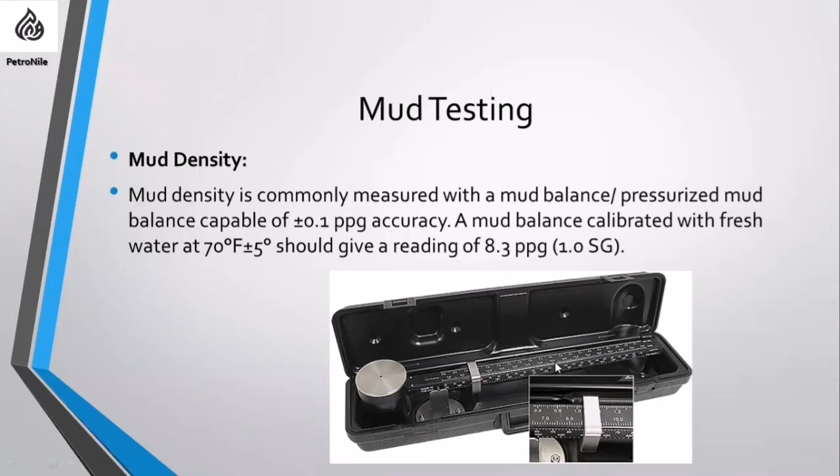Marsh funnel viscosity. Marsh funnel viscosity is the time required in seconds for a quart of mud to flow. This is the quart cup. We put mud here until it fills the Marsh funnel and let the mud flow from this opening to fill this cup. We will check how many seconds it takes to fill this cup, and we will report that time as the Marsh funnel viscosity in seconds.

And 1 quart of water should flow through a Marsh funnel in 26 plus or minus 0.5 seconds. So this is the Marsh funnel and mud balance. This will be a check on the top of the mud tanks; it will not be in the mud lab. You will check by derrickman or mud tester or mud boy. These are all names for the mud helpers, from the crew, to help the mud engineer.

He has to check the mud density and the Marsh funnel viscosity every 30 minutes and record in the book. And the mud engineer checks from time to time, checks the book and also checks by himself.

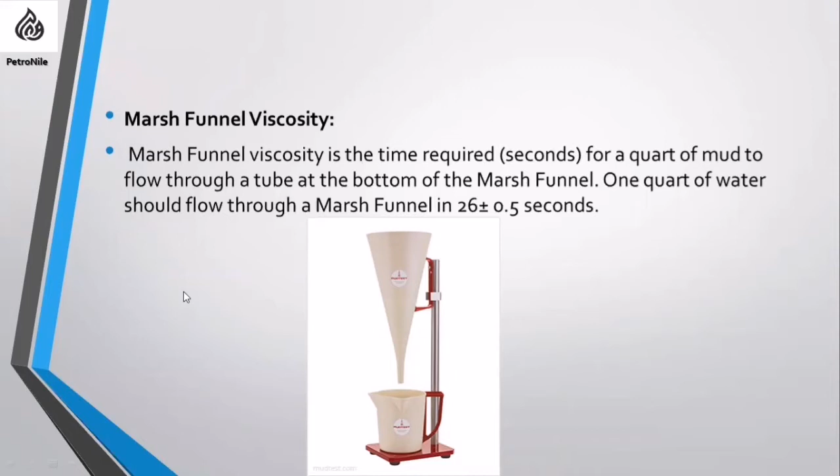Rheology: this is the rotational viscometer, sometimes we call it rheometer. This is used to measure shear rate and shear stress of drilling fluids, and plastic viscosity and yield point are calculated directly from readings. We have 6 readings here: 600 RPM, 300 RPM, 200 RPM, 100 RPM, 6 RPM and 3 RPM.

Also, a long time ago, the old rheometer had 8 speeds. It also had 60 RPM and 30 RPM, but now just 6 readings is enough for most rheological models. We take the data from these readings and calculate. PV is equal to the 600 reading minus the 300 reading, and YP is the 300 reading minus PV. This is as per the Bingham plastic model.

Here, this is the instrument. This is a gear. This gear has 3 levels. Here down, going a little bit up it will be in the center, and going to the top it will be up. Here is down, and we have a key here, high and low. The other side does not appear in this picture. We will put mud here inside, and this will rotate with RPM as per this gearing and knob adjustment. We have here this table.

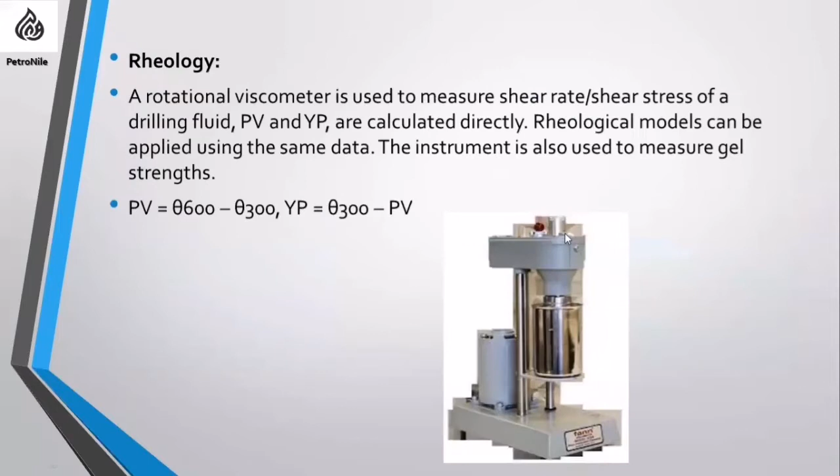Viscometer switch in high, and gear shift knob in the down: this will read 600 RPM speed. Then you will read the deflection here from the top. For the 300 reading, the viscometer switch will be in the low and the gear shift knob will be down also. For 200 and 100 the gear will be up, and the switch will be high for 200 and low for 100. When the shift is in the center, the reading will be for 6 RPM in the high and 3 RPM in the low.

After recording all these readings for 600, 300, 200, 100, 6, and 3, we can check the PV and YP, and also we can check some equations as per the rheological model, and this will usually be calculated by software for Reynolds number and annular velocity and everything in the rheology. We will discuss it, inshallah, in the next session.

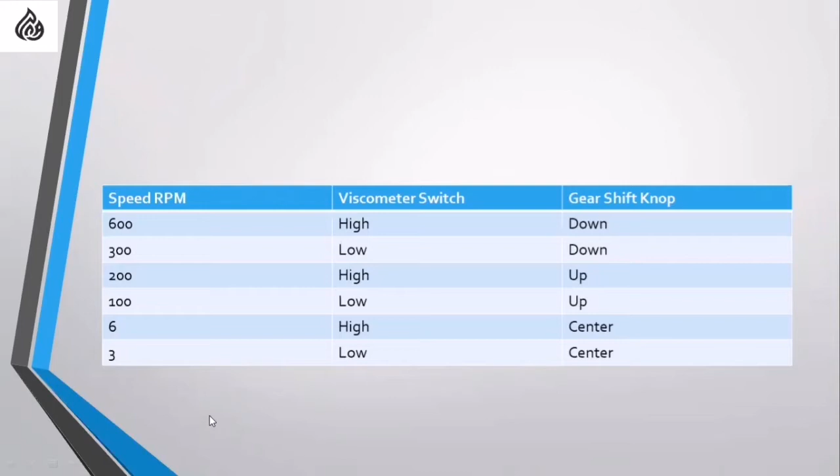Also for gel strength, we will read just 3 RPM. After 10 seconds, we will read the first deflection. This will be the 10-second gel strength. And after 10 minutes, also at 3 RPM, we will read. This will be the 10-minute gel strength. Also, sometimes we need to report the gel strength for 30 minutes, after half an hour. This is for the viscometer.

We also have the static filtration test. We have two types of test for static filtration: API filtration and HPHT filtration, high pressure, high temperature filtration. This test is used to indicate the filter cake quality and filtrate volume loss for drilling mud under specific testing conditions. API filtration will be under 100 psi for 30 minutes and reported as ml per 30 minutes, and filter cake thickness will be reported in 1/32 inch. 1/32 inch is equal to 0.8 millimeter.

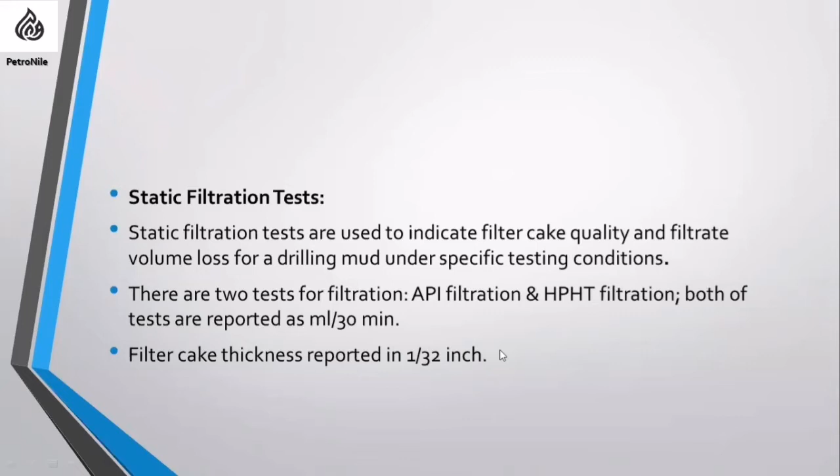For HPHT, the top pressure will be 600 psi, and the pressure from the bottom is 100 psi. So the test will be under a differential pressure of 500 psi, and we will also put it at high temperature. This depends on the bottom hole temperature. We can make the test up to 300 degrees Fahrenheit. This is the API filter press, and this is the HPHT, high pressure, high temperature filter press.

Here we put our sample inside and apply 100 psi from here, and filtrate will come from this opening for half an hour. We will check how many ml of filtrate we get, and this filtrate will also be used in titration for other tests.

Here in HPHT, we will apply 600 psi from the top and 100 psi from the bottom, and the sample will be inside, and this heating jacket heats the sample up to the required or desired temperature, and we will put a thermometer from the top here to check the temperature, and we'll adjust the temperature from here.

When we reach the temperature of 300, 250 or 280 as per the test needed, then we will start to apply the pressure and start the test. We will collect the sample from here. You have to open and check from time to time and collect till you finish the 30 minutes.

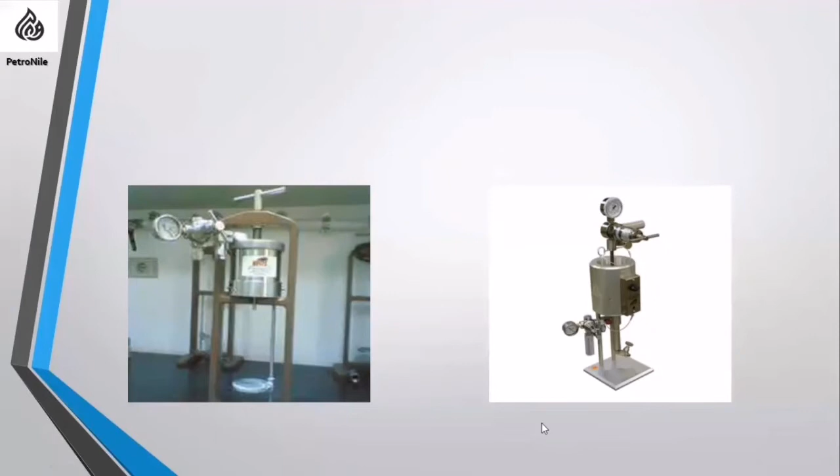And after finishing the test, you have to disassemble this instrument and check the filter cake thickness and filter cake quality. The retort is to check water, oil and solids percentage. This is the volume percent of the liquid phase.

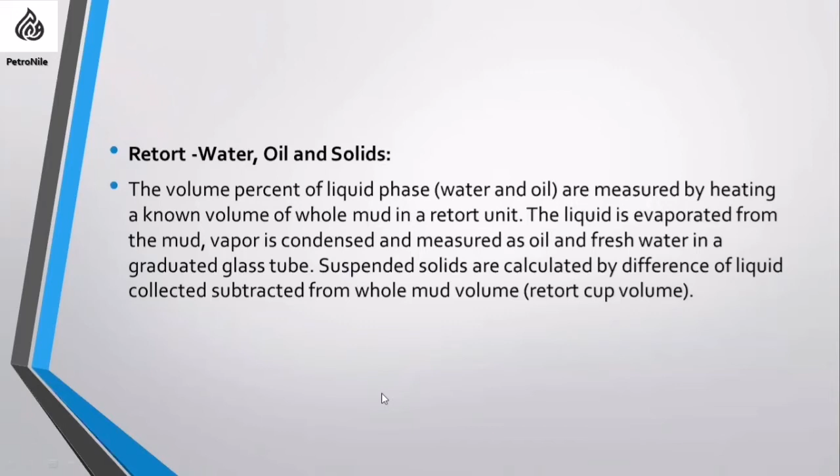Water and oil are measured by heating a known volume of whole mud, sometimes 10 mls, sometimes 50 mls, depending on the retort capacity. The liquid is evaporated from the mud. Vapor is condensed and measured as oil and fresh water in a graduated glass tube. Suspended solids are calculated by the difference of liquid collected subtracted from whole mud volume. It's in percentage. You have here, this is a retort.

This is the cylinder for 10 ml, this cylinder for 20 ml. We have also a cylinder for 50 ml. If we use, for example, this 10 ml, we will put mud inside and we will put steel wool inside to prevent the solids coming out and close this opening, because we just need the evaporation to come here. This cylinder will be inside the retort, and the evaporation will be condensed in this condenser and the liquid collected here.

This is like an oven only, just to heat the sample and evaporate all the liquid phase, condense it in this condenser and collect it here. We have 10 ml. If we get, for example, 8 ml liquid phase, oil plus water, that means we have 2 ml of solids. This 2 ml of solids from 10 ml means our solids are 20%.

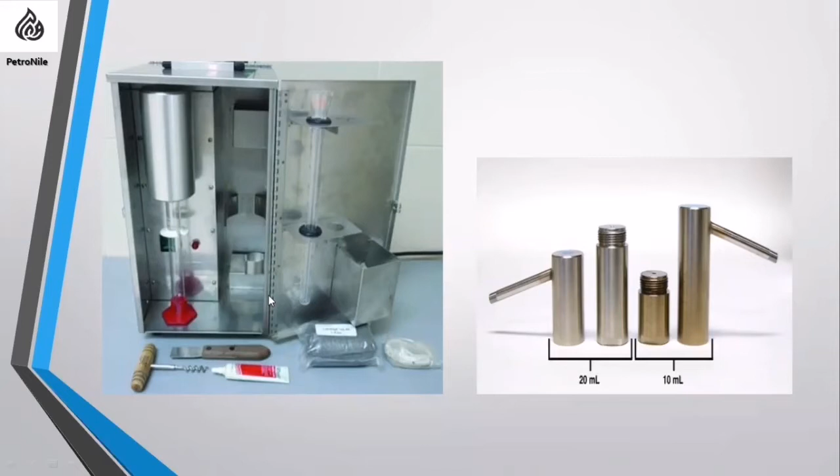It's calculated as a percentage. And from this, we do our calculations to check the LGS, low gravity solids, and high gravity solids, HGS, drill solids, and all solids analysis calculations. This is a retort. The test may take 1 hour or a little bit more.

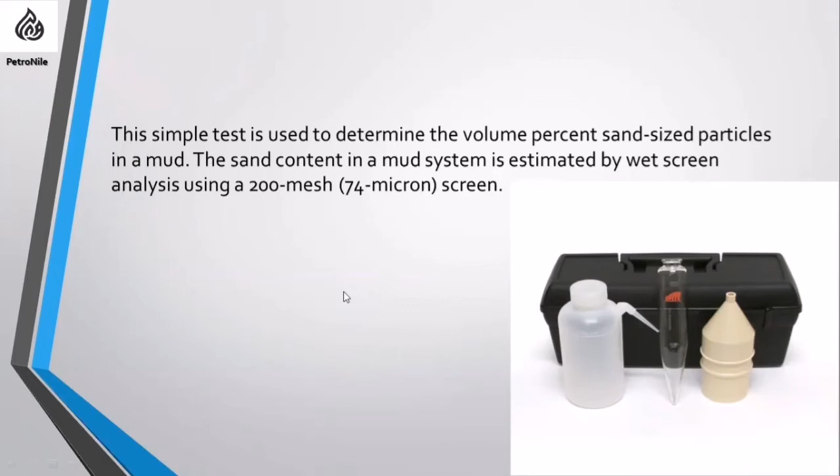If it's more, you have to dump the sand trap, dilute your mud with fresh mud to decrease the sand content, and also run the desander and desilter or mud cleaner and put a fine screen on the shaker, all this to control the sand content. Why do we need the sand content as low as possible? Because sand is an abrasive material. It causes wear on the drill string and the directional tools.

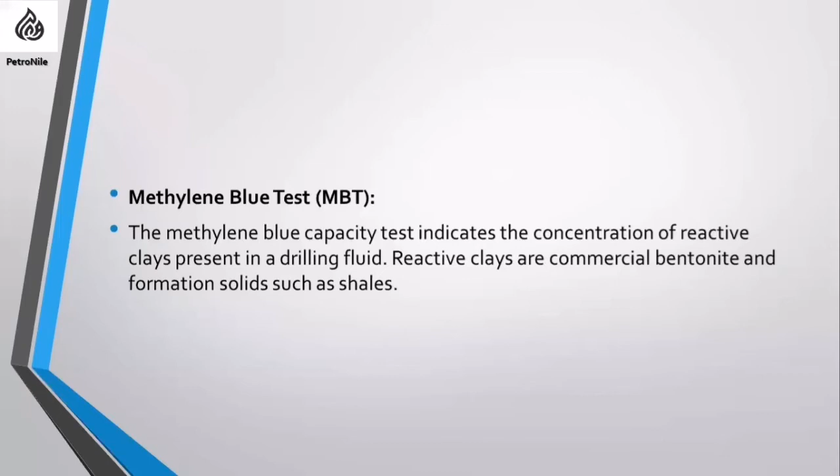The next test is the methylene blue test. Its abbreviation is MBT, methylene blue test. Sometimes we also say CEC, cation exchange capacity. The methylene blue capacity or methylene blue test indicates the concentration of reactive clay present in the drilling fluid. Reactive clays are commercial bentonite or formation solids or drill solids when we are drilling clay or shales.

And we have this MBT kit. The MBT kit is like a titration. We put 1 ml of mud inside this flask, and after that hydrogen peroxide, 3% hydrogen peroxide. We will put 15 ml, plus 10 ml of distilled water and 0.5 ml of 5N sulfuric acid. We'll put all this mixture together and heat it on the hot plate for 10 minutes.

After boiling for 10 minutes, we will dilute with distilled water up to 50 ml in this flask. After that, we will bring the methylene blue and add it, 0.5 ml of methylene blue, to this mixture and shake. And with this glass rod, we will put a drop on the white paper and check the color.

In the beginning it will appear as a blue ring, and again add 0.5 ml of methylene blue, shake, and again check by rod another drop till you reach this greenish circle. This here will be the endpoint.

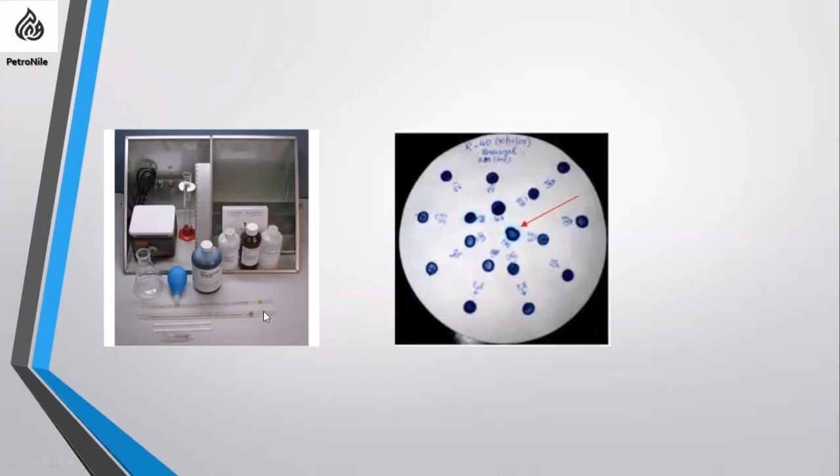When we reach this, we have to calculate how many mils of methylene blue we added to the mixture from the start of the test, and this volume of methylene blue we have to multiply by 5 to report MBT in pounds per barrel. For example, if we use 2 mil of methylene blue, that means our MBT is 2 multiplied by 5, which is 10 pounds per barrel.

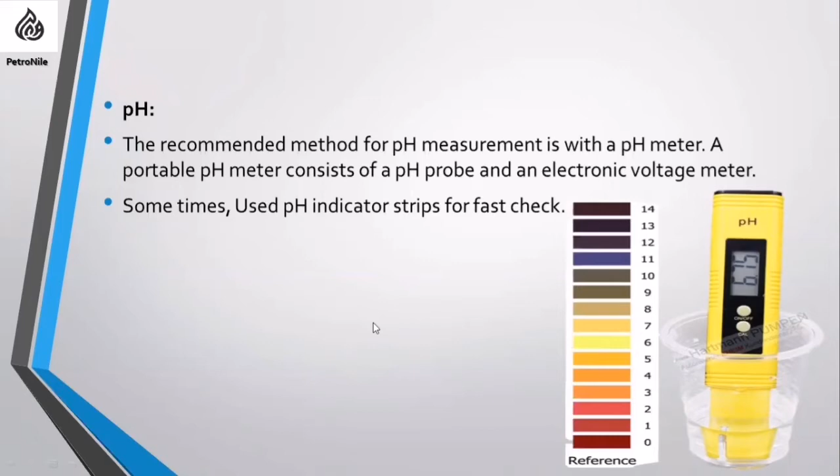We can put the electrode of the pH meter inside the mud or inside the filtrate and check by electronic way. This is surely more accurate because it gives you two digits, but here you cannot check. You can just consider it as 9.5 or like this by estimation, but it's not accurate. This is for pH.

For titration, we have many titrations. We collect the filtrate and make the first titration, the Pf, the phenolphthalein filtrate. Phenolphthalein filtrate means the sample needed is filtrate and the indicator will be phenolphthalein. We take 1 ml of filtrate and put it on the titration dish with 2 to 3 drops of phenolphthalein. The color will change from the filtrate color to pink after adding phenolphthalein.

Then we will titrate with sulfuric acid 0.02N, 0.02 normality H2SO4. Then the color will change from pink to the original color of the filtrate. We will report Pf as the mils of H2SO4 which we used to change the color from pink to the original color.

When the redness is taken out and the original filtrate color appears, this will be the endpoint of this test. We will check how many mils of sulfuric acid 0.02N we used, and this will be reported as Pf, as mils.

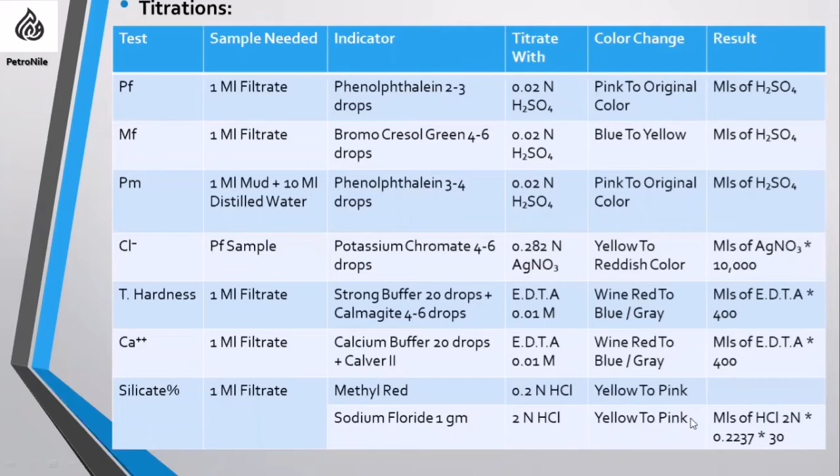Also, we have the KCl test. We will take 7 ml of filtrate and 3 ml of sodium perchlorate and put it in a glass tube, and in another glass tube we will put just water to balance, and we will run the manual centrifuge at 1800 RPM. The precipitation is compared with a graph, and from this graph we check the KCl percentage. This is if we use KCl in our mud; if there is no KCl, there is no need for this test. This is most of the testing.

Now we have completed all the tests, but I advise all participants in this session to go to YouTube and watch some videos to learn more about these tests, because you have to see these tests with your own eyes. And if you have the chance to go for training or to the field, you have to do the tests yourself to become professional in them.

We have here pilot testing. It's an essential part of drilling fluid testing and treating. Pilot testing minimizes the risk of sending a fluid downhole that may be incompatible with the formation to be drilled, or that may be ineffective under downhole conditions. What's the pilot test? Sometimes you go to the field and find a chemical you're seeing for the first time. You cannot work with it directly. You have to make the pilot test in the lab and check that this material is okay at this concentration and gives you the parameters you need, and after that you can apply it in your mud tanks.

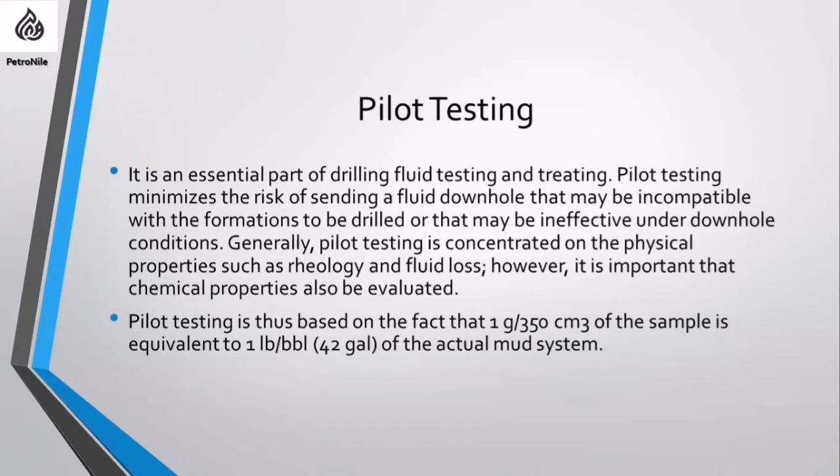This is pilot testing. You have to do pilot testing from time to time to check if you want to increase some chemical concentrations, or to check whether a chemical is working or not. You put the suitable concentration, and you find the test results are not good. You have to make a pilot test to check how your chemical is going.

For mixing procedures, if we need to mix mud, for water-based muds, the first type is spud mud. This is a simple mud. It's a bentonite or gel mud.

It's called spud mud or gel mud, bentonite mud. It's just water and add soda ash. This is sodium carbonate. Soda ash to treat the water hardness, to treat the calcium. And if you have magnesium in our water, we will treat it with caustic soda.

But normally, magnesium will not be available in the water, except if the water comes from the sea or you're working offshore. Sometimes we have hard water with too much calcium and magnesium. But normally we have soda ash to treat the calcium, and after that add bentonite. Here bentonite works as a viscosifier and wetting material also.

And we'll leave this mixture for hydration 8 to 16 hours. And after hydration finishes, then we'll add caustic soda for pH. Usually concentrations will be in the mud program, but normally we use soda ash at a concentration between 0.25 to 0.5, but it also depends on your water hardness.

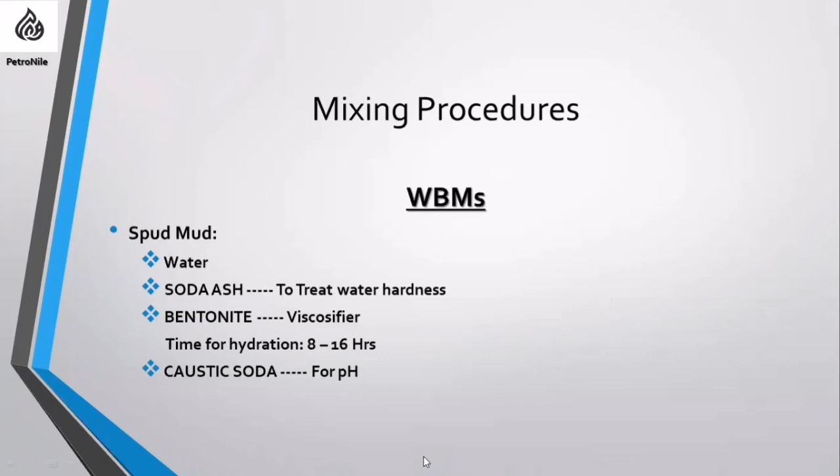Okay, for polymer or salt polymer mud, we add water. This is the base fluid for water-based mud. Soda ash to treat the hardness, caustic soda for pH, and fluid loss controller, such as starch, PAC, CMC. We have many chemicals for fluid loss control, and after that add viscosifier, such as XC polymer or Duo-Vis or xanthan gum.

And then add salt or KCl. This depends on the mud program. Salt is for salinity, inhibition or weighting material. KCl is for inhibition and salinity. KCl is not used as a weighting material because it's expensive. If you are going to a higher mud weight, you will add barite as a weighting material.

Up to the viscosifier, this will be polymer mud. If you add salt, it will be salt polymer mud. If you add KCl, it will be KCl polymer mud. If you add silicate, it will be KCl silicate mud. If you add PHPA, it will be KCl PHPA mud. If you add polyamine, this will also be a type of inhibitive mud, KCl polyamine mud. If you add glycol, you will call it KCl glycol mud.

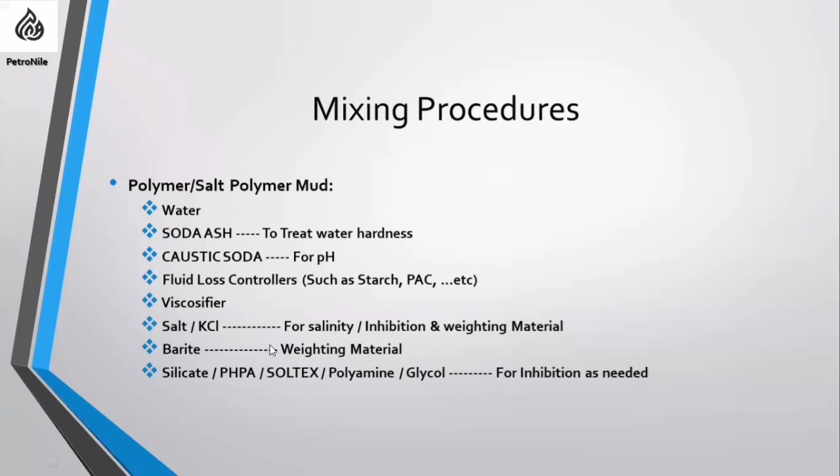It depends on which type of inhibitor you use. All these are used for inhibition. Sometimes we use them together, sometimes we use just one of them. But PHPA cannot be with silicate. Silicate is separate. But PHPA, polyamine, glycol, all these you can mix together. This is for water-based mud.

For OBM, oil-based mud, you have to mix in 2 tanks. The first tank will be base fluid, diesel or mineral oil, and add after that primary emulsifier and secondary emulsifier, and then add fluid loss controllers. Here for OBM, it's not like starch and PAC, it's asphaltic material. And you add also lime. In tank number 2 you will add water and calcium chloride. This brine you will add here.

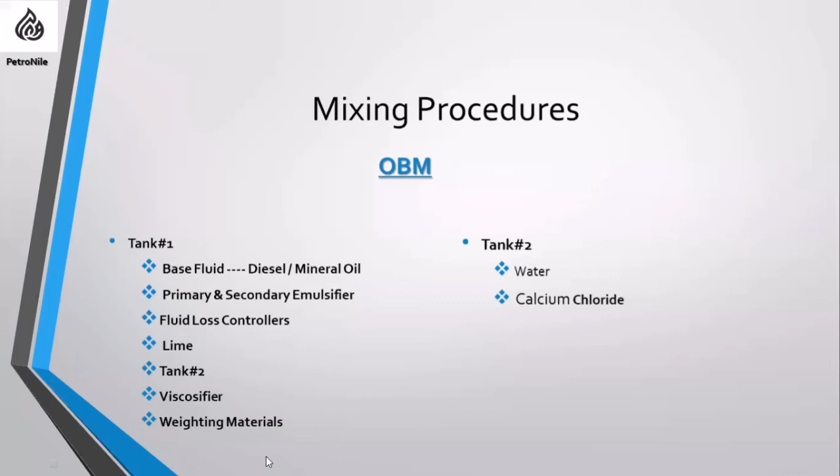After you add all of this, you will add tank number 2, mix it together, and after that you will add viscosifier, and then weighting material. This will be OBM. But most of the time on the rig, you receive ready OBM from the mud plant because it's too expensive to mix it in the tank, but sometimes you have to mix at the rig site. This is for mixing procedures.

We have here mud reporting. The mud report must be accepted as a record of past events and must be trusted as a true reflection of the fluid state at the time of reporting. The report has to reflect the truth, what we actually did, because this will be an offset well for the next well. If you put fake data in the mud report, this mud report will be useless in the future.

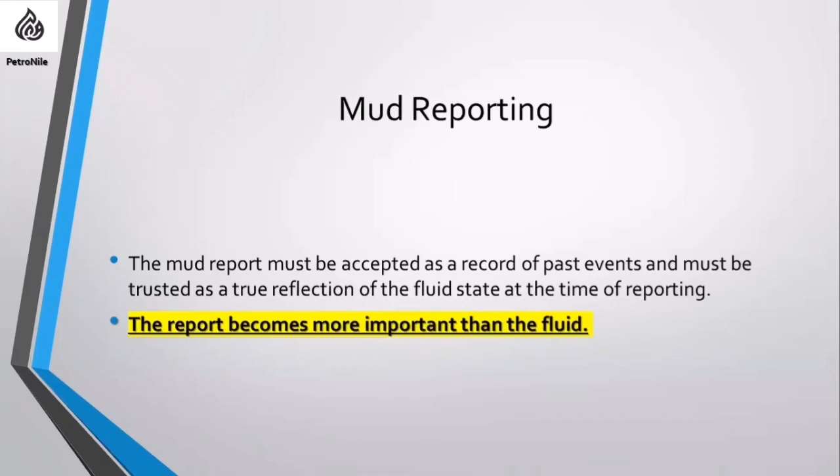And reports become more important than the fluids. If you make a good report, you are considered a good mud engineer, because reports talk and show yourself. Okay, mud reports must contain the mud properties. It's a complete set of the test results.

All the tests we said, you have to make them twice a day at least and report them in the mud report, in the DMR. And also hydraulics and rheological parameters. This is by calculations. Most of the reports have some software, so this comes automatically. You will not calculate it by yourself.

Also, the mud report must contain the rig operations and engineering comments. Engineering comments, for example, today you mix some mud, you have to write: mixed 200 barrels of light mud to dilute, and we added some soda ash to treat the calcium. We added fluid loss control to enhance the filtration. You add some XC polymer to enhance your rheological parameters, like this.

These comments will be useful for someone to track the operation and know what's going on at the rig site for the office people, and also when they want to make a new mud program, the office guys have to go check the old reports and read all comments to be used as a lesson learned.

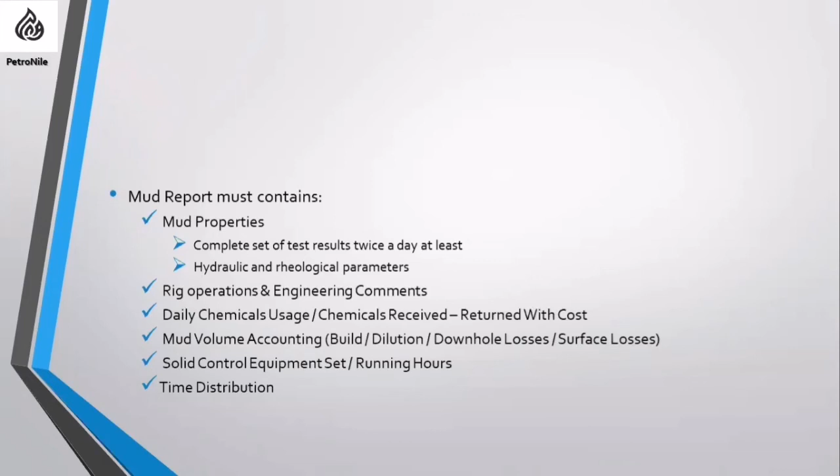Now we reach the end of this session, and I think we have some questions and discussion. Let us start our discussion and questions and answers. I will check the questions here. Maybe the moderators have some. Okay, here.

KCl chart, how is it generated? If you want to generate it by yourself, you have to make a lot of tests and readings and check, but it's ready. It's available in the books, but you can make it. It's just a straight line from 0,0, and you have precipitation and percentage. You can make it. I will bring the chart next session, inshallah, for you to see.